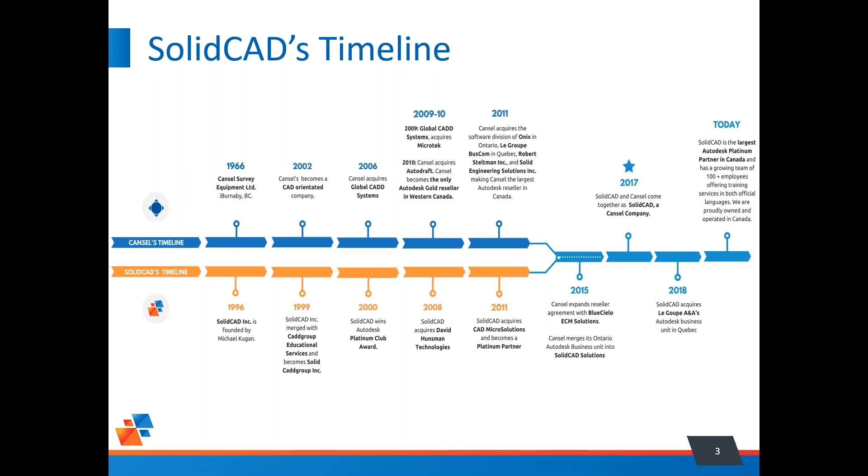So SolidCAD, for those of you who do not know us, is a Canadian company, currently the largest platinum partner of Autodesk and a member of the Cansel group of companies, established in 1996 with a long history in the Autodesk channel. The largest technical team in Canada, specialized in a number of industries: plant and process, manufacturing, AEC, civil infrastructure, media and entertainment.

We support and help our customers become more proficient using Autodesk and other tools through training, consulting, technical support, scan to BIM services, software development, product lifecycle management, and simulation and analysis. Offices across Canada, 15 at this moment, and 12 training facilities coast to coast.

And as a part of Cansel Group, we have access to end-to-end solutions from hardware to surveying equipment, laser scanning, GIS software, and CAD software. Some other tools that we are deeply involved with: FluidFlow, which is really the topic of today's first webinar, and other tools covering different industries.

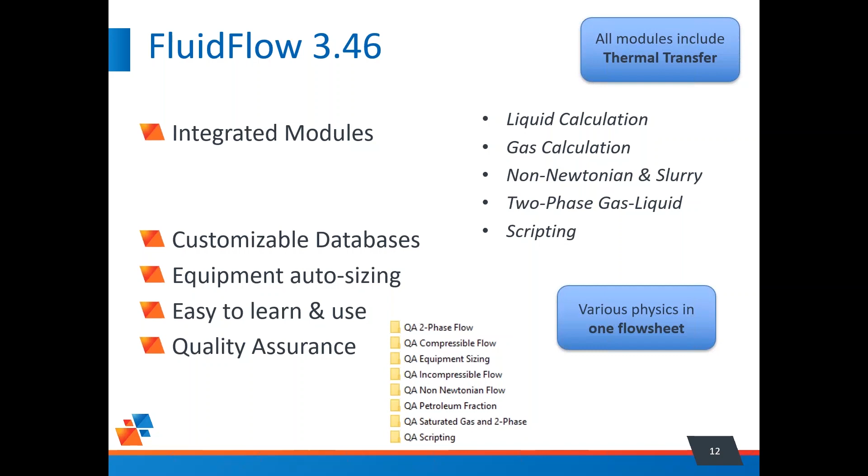So let's look in a little bit more detail here. So incompressible flow, typically for liquids. Some of the important features here are going to be a quick plot of energy and hydraulic grade lines, so you can identify areas of potential problems in your network, especially in liquids flowing downhill, or potential negative static pressure or cavitation problems. The screenshot there, it's a composite pump curve when pumps are used in series or in parallel.

I mentioned auto sizing of components as an important feature. So for piping, it's using the economic pipe sizing model or Genereaux equation. For pumps, the size for flow or size for pressure rise. Other components that could be auto-sized: valves, control valves, orifice plates, rupture discs. Viscosity correction based on Hydraulic Institute recommendations, and affinity law correction for impeller trimming also included.

And in terms of applications, pretty much anything that requires liquid transport: cooling water systems, fire protection systems, mine dewatering, fuel, crude oil, lubricant systems, water transportation systems, desalination plants. So these are just a few applications. I'm sure you can think of some of your own where you could use this.

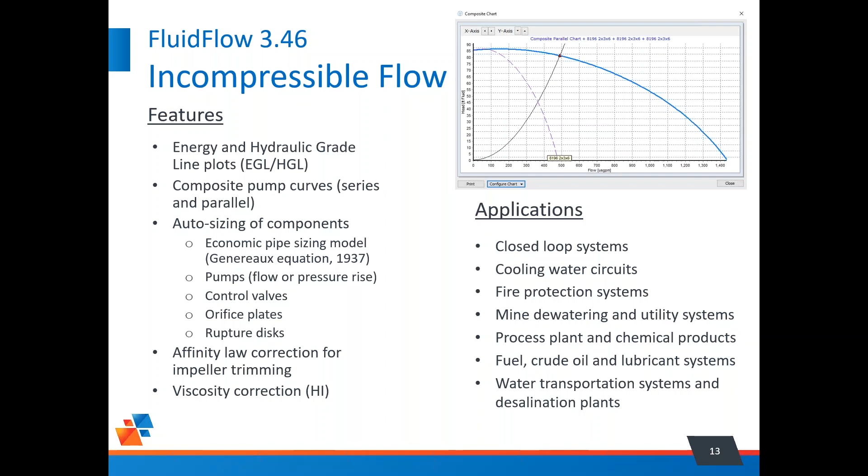The compressible flow module. The important part here is to recognize that FluidFlow does not use an ideal gas approximation, but uses real gas conditions. So there are currently three equations of state built in: Benedict Webb-Rubin with Hans Starling modifications, Lee-Kesler, and Peng Robinson. And this contributes to higher accuracy of results in a gas network.

Some other options here that are going to be important: easily building gas mixtures by mole or mass percentage, detecting sonic choking in components, again, auto-sizing of components, ducts, fans, and compressors, safety relief devices. Addition of heat transfer module allows us to look at the Joule-Thomson effect as well, and the plotting of composite fan curves for series and parallel fans is also important.

And some applications as an example, application examples that our customers use FluidFlow for: dust extraction systems, gas collections, natural gas supply feeds, and then transmission pipelines.

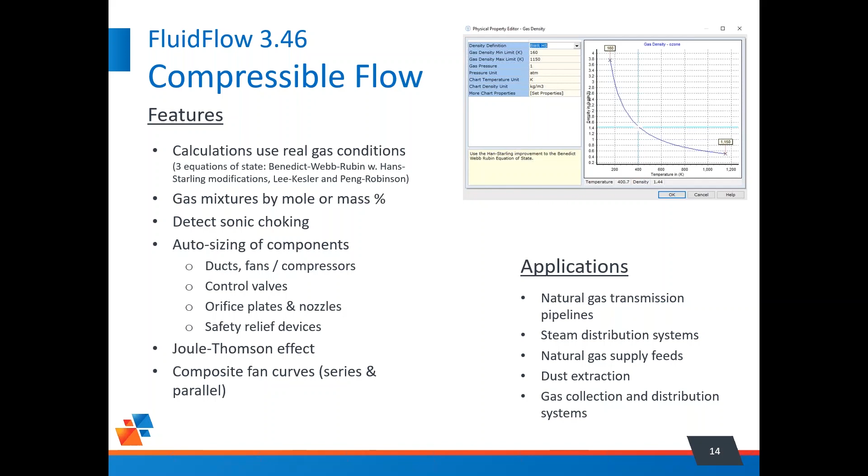Two-phase flow. Currently 8 available two-phase correlations. A highly accurate marching along the pipe solution algorithm for improved accuracy. Automatic flow pattern maps generated, one of which you are looking at right now. You can see the current flow regime on that selected component, stratified wavy. So all this is generated very fast.

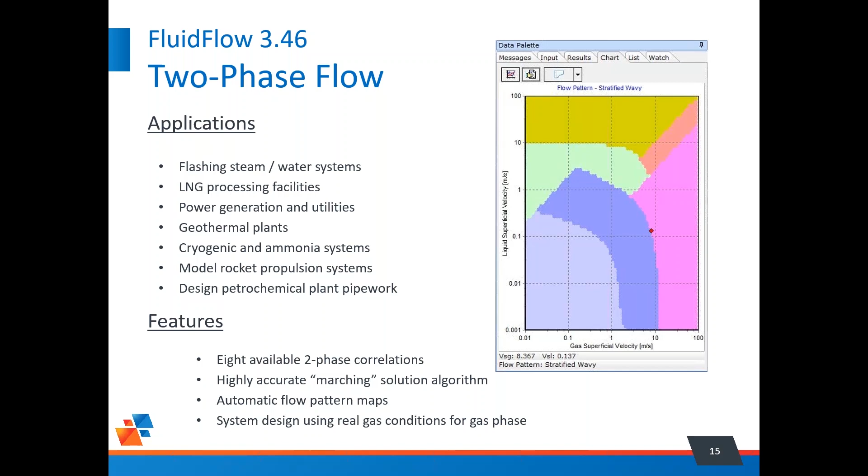The next module, non-Newtonian and slurry flow. Some important tools here that are going to help you in your design process. The ability to include pump derating due to solids. The ability to look at calculated solids delivered per unit time. The ability to find deposition velocities and consequently if blockage may occur in pipes. In general, operational issues and energy saving opportunities.

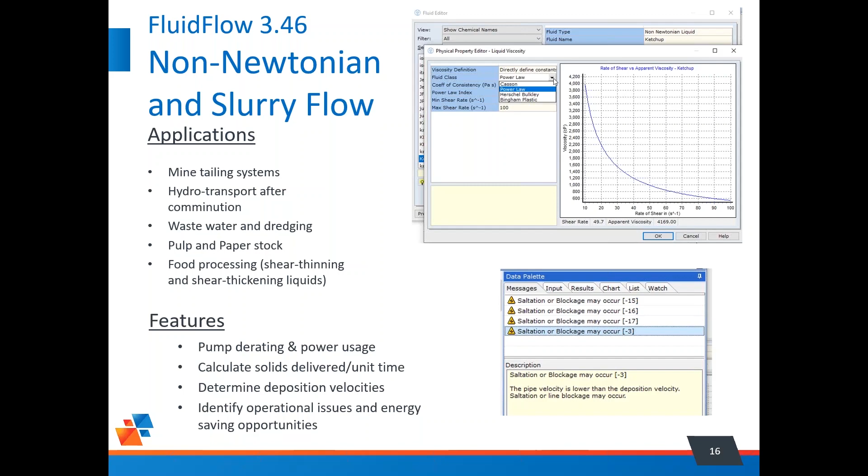Typical applications: mine tailing systems, hydro transport after comminution processes of ore, wastewater and dredging, pulp and paper stock calculations also included. And we have quite a few customers in food processing industries that require shear thinning and shear thickening liquids, molasses, ketchup, you name it. So mayonnaise, yeah. So those are typical fluids in this industry that FluidFlow is being used successfully.

And lastly, scripting or dynamic analysis. So this is a module that requires some programming skills. We're using Pascal and Basic syntax here, languages to create macros that will allow us to tackle all sorts of problems. Basically anything that typically would be manual input or a manual change of boundary conditions, you could think of including in a macro. This way you can look at time dependencies in a system, when boundary conditions vary,

tank fill and drain times, optimization of, let's say, a pumping station where you might want to find an optimum impeller or pump speed based on different pump properties and pump types. So in terms of outputs, you could get results in the graphical window inside FluidFlow, or export those results into Excel, create graphs in Excel. So quite flexible this way.

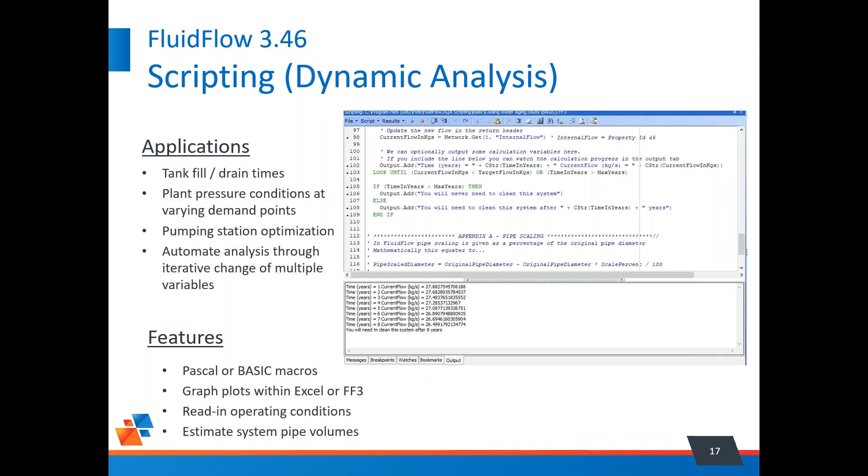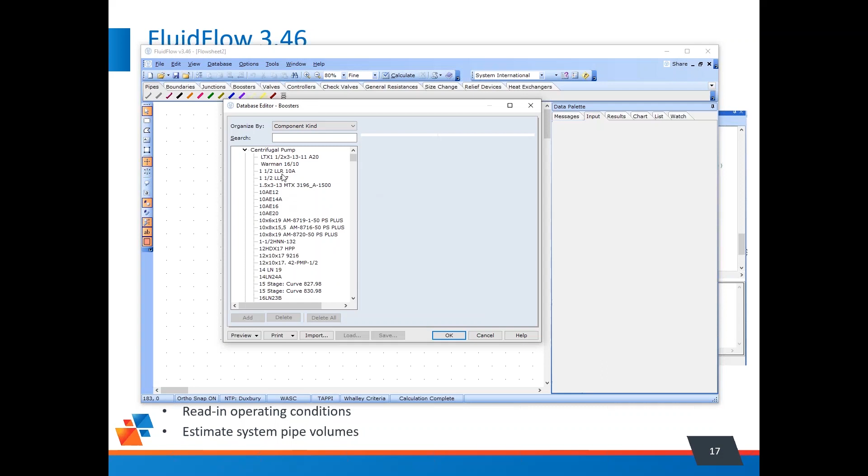Different, let's say, pumps, right? Boosters and fans, pump curves defined here. Everything that entails data entry here has different ways to fit the curve. Again, depends on the type of data, and these databases are definitely important in terms of proper functioning of the software.

About 1,300 fluids currently defined, so out of the box, and as I said, fully customizable. You can create your own fluid and your own mixture. If I'm to, let's say, filter through a simple Newtonian liquid, based on the definition, you'll see in what kind of modules that fluid has enough information to be used in.

So in this case, this kerosene, it's going to be used in a liquid-only application, while a pure Newtonian fluid like ethanol, for example, has enough data that could be used in liquid, gas, and two-phase modules.

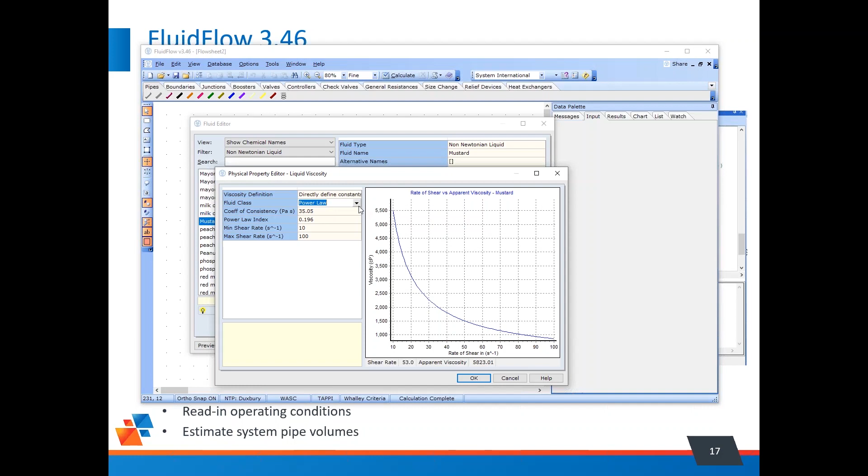Right. Here are some non-Newtonian liquids. I mentioned the food processing industry. Here's a mustard example, and viscosity law defined in this case as a power law. So you can see the viscosity dependency with shear rate. Okay.

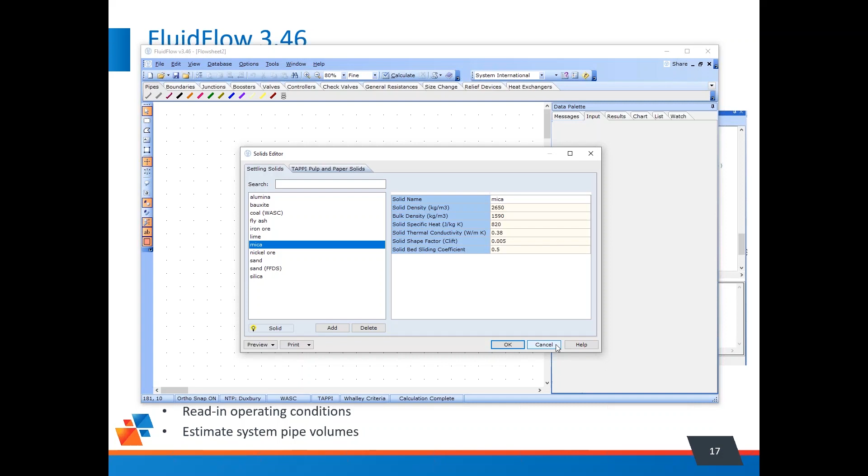Solids database, that's going to be important in settling slurry definition. For example, here's a mica, a solid with the bulk density and solid shape factor value, so the deviation from a perfectly spherical particle. All these properties important for an accurate calculation.

Okay, so again, from an interface standpoint, different tabs that will store different components here. So in terms of pipes, boundaries, so assigned pressure, assigned flows, reservoir, junctions, T, bends, Y, cross, or a generic connector. No resistance through this, but multiple pipes that could come in and out. Boosters, centrifugal pumps, PD pumps, fans and compressors, positive displacement pumps and compressors again.

And valves, typical standard valve types, control valves, flow and pressure control, check valves, general resistances, so CV, CF, and so-called user-defined generic. So this is quite useful when you have a piece of equipment that's not present in the database, but you have actually catalog information about it, and you can define flow properties this way through relationship functions.

Size changes, reducer expanders, venturi tubes, orifices, relief devices, heat exchangers, shell and tube heat exchangers. So different component types, all available out of the box. No need to purchase extra databases of components. They're all included with the software.

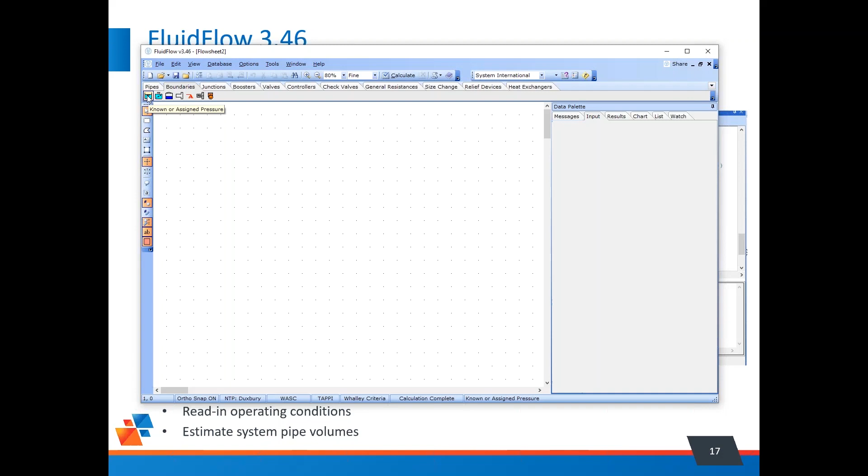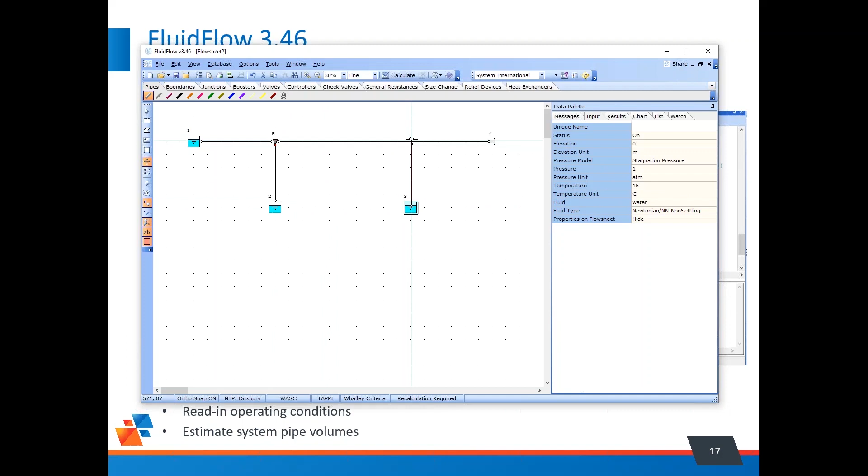So how do you typically operate? It's pretty straightforward. Start with a boundary condition here, and let's say start with a set of, for example, known pressures. I'm just going to throw maybe a couple of known pressure options here. Go back to pipes, and let's say I'm connecting these pressure nodes to pipes and end that with an open pipe. Connect this one with an existing pipe that adds a T junction right away. Very straightforward, easy to work with. Right?

So in terms of units, I could easily change from US Basic to SI. Properties, well, you've got length, you've got elevation on nodes, and the actual fluid. So let's, for example, quickly create a mixing network here.

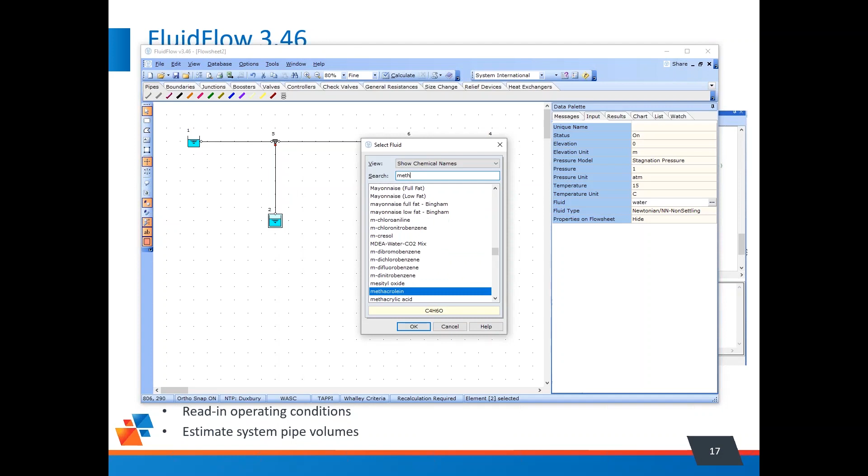So let's say ethanol at 1.7 atmosphere coming in here, maybe methanol. So right now I'm poking into the fluids database, right? Newtonian and non-Newtonian non-settling type, so not a slurry. Say maybe 1.5 atmosphere, and then let's say octanol, for example, at 1.5 as well. Now let's do something else.

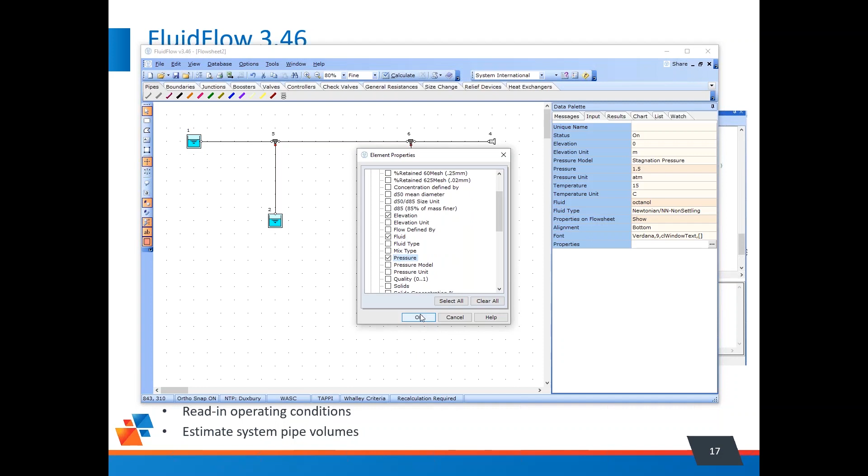Maybe I'd like to see some information on screen, which I could also look at using the flyby like that. But I'm going to select these pressure nodes and show some properties on flow sheet, like maybe elevation, maybe fluid, maybe pressure. There you go. And let's do a calculate, right? So we can see the flow direction easily, and also some messages here, high pipe velocity.

So as I mentioned earlier, we're using an economic pipe sizing model by default using the Genereaux equation. So this is flagged as a warning because of the calculated velocity on that pipe segment, which, by the way, its number is here, -1, right? Calculated velocity is 14 feet per second. Suggested economic velocity and an economic size about, let's say, 4 inches.

Economic velocity at 4.2 feet per second. Okay? So too narrow pipe, too high velocity. By the way, these warnings, you actually can configure the limits on them. If I'm looking at liquid limits here, there you go. So what's considered too high pipe velocity, it's about 14 feet per second, right?

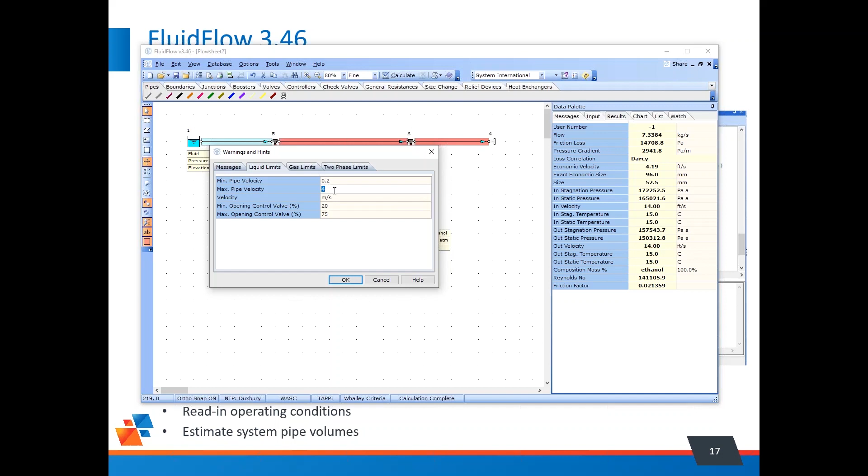So the calculated one is, sorry, let's say 12 feet per second. The calculated one is 14, out of range, hence the warning. So very straightforward to work with. Let's maybe jump into a couple of other examples here before we run out of time.

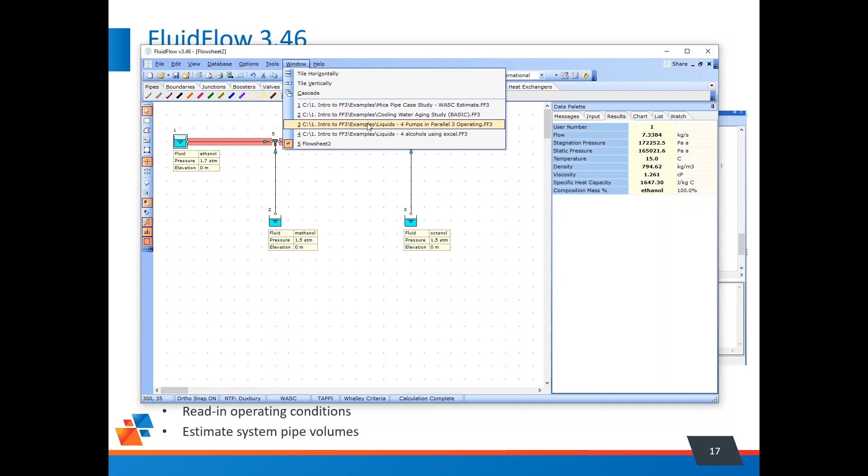So let's say, for example, here's a slurry network that goes at different elevations. All these nodes have a different elevation listed here. So if I'm going to hit calculate on that, so what do I have here?

I have an input into the network of 45 cubic meters per hour as a total slurry flow of water as carrier and mica as a solid defined by a weight percentage. I'm not using size distribution data. I'm simply using D50 and D85 at these values.

So what can I get from this? Well, on the outlet here, I can get solids delivered. So I'm looking at just under 3 kilograms per second of solids delivered, a total flow. On a pipe, I'm looking at deposition velocity here, right? So all important information to see if I'm running the risk of a blockage or not.

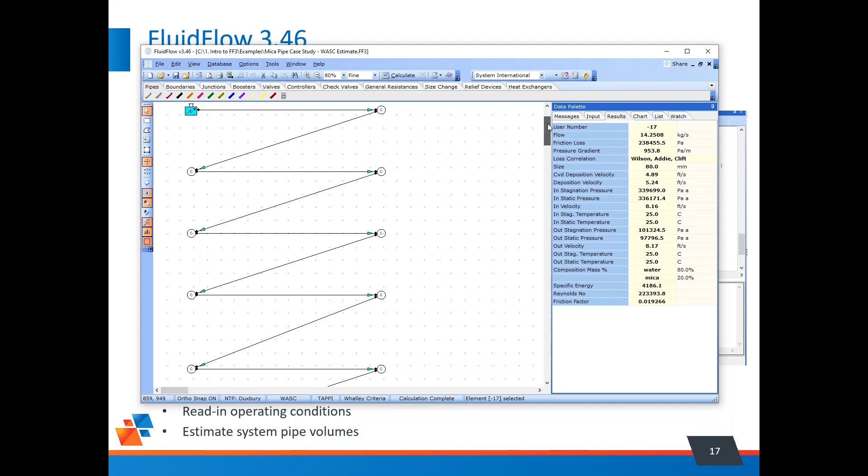So out velocity calculated is 8 feet per second, deposition velocity of 5. So no risk of blockage. Or if we decrease the flow, let's say 25 cubic meters per hour. Okay, and in this case here, what the message is saying to us is saltation or blockage may occur.

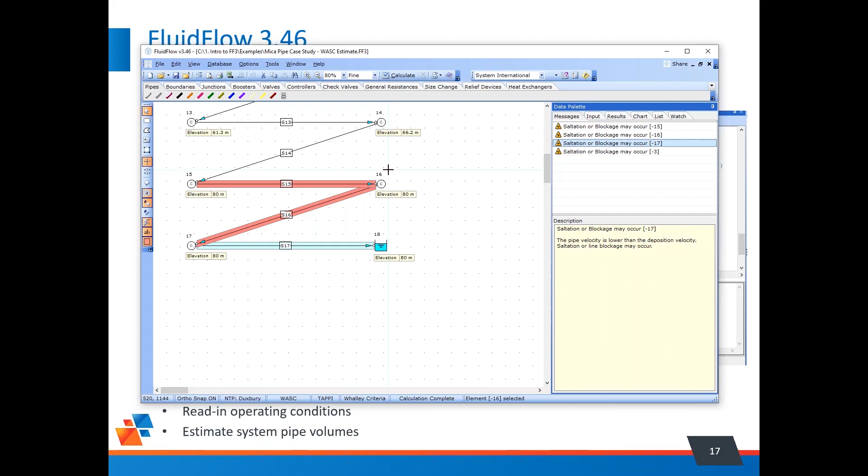Right? So now my out velocity, calculated 4.5 feet per second, is very close here to the CVD deposition velocity. Right? It's just under it. So a warning that I may run the risk of blockage in the pipe, and a few more pipes with the same warning. So a quick example of slurry transport.

Let's look at this one here, 4 pumps in parallel. So we have these pumps right here, right, and the reservoir containing water, and we're transporting that farther out and higher up.

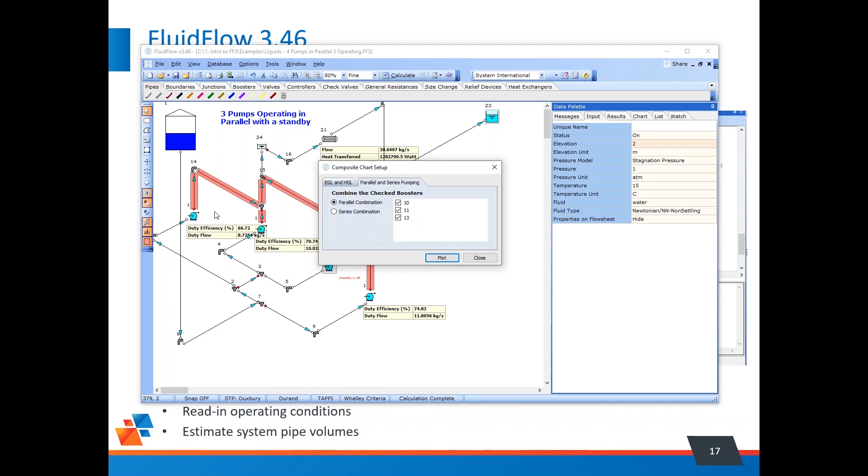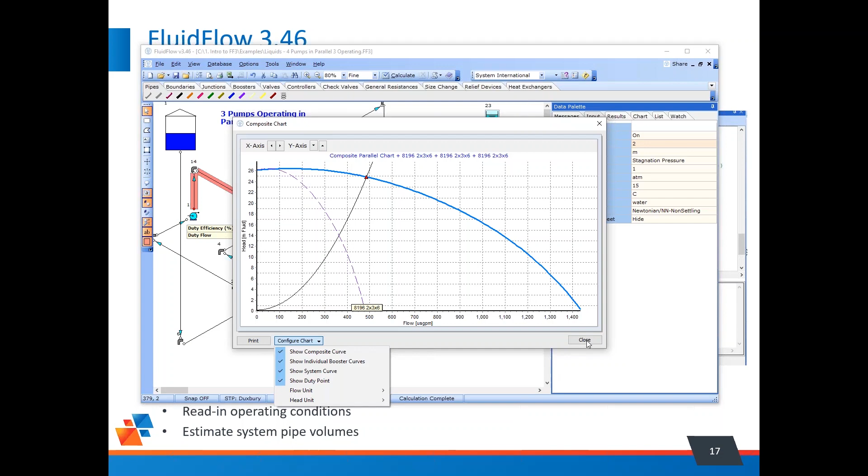And if I am to show the composite chart setup, let's say between these 3 boosters, 10, 11, and 13, these are the node numbers of the pumps. The composite chart looks like that. Okay, so you can see the duty point there. You can see the system curve and the individual booster curves. These are all identical pumps, so one single curve for that. Okay. Again, very useful information.

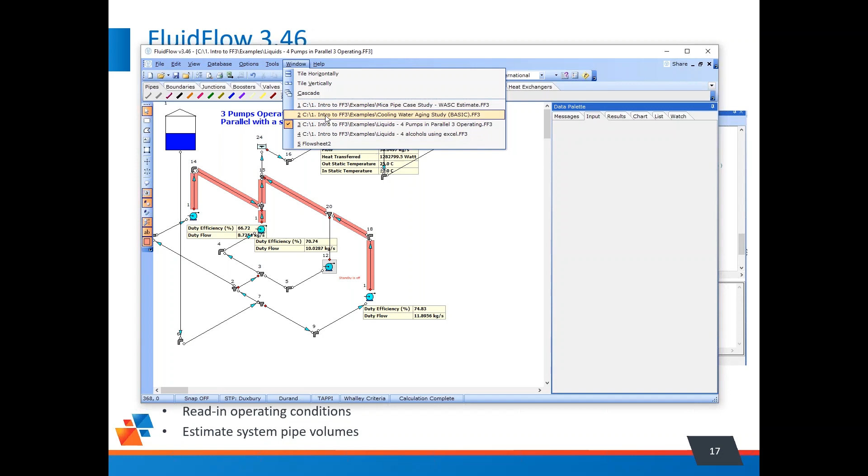And lastly, gonna jump into this as a scripting example. Okay, so let's say over a period of time we have some scaling happening in the pipe, so some deposition of material there that reduces the diameter, and we would like to get an estimate on after how long we should schedule some maintenance, some cleanup, or maybe some replacement on some of these pipes.

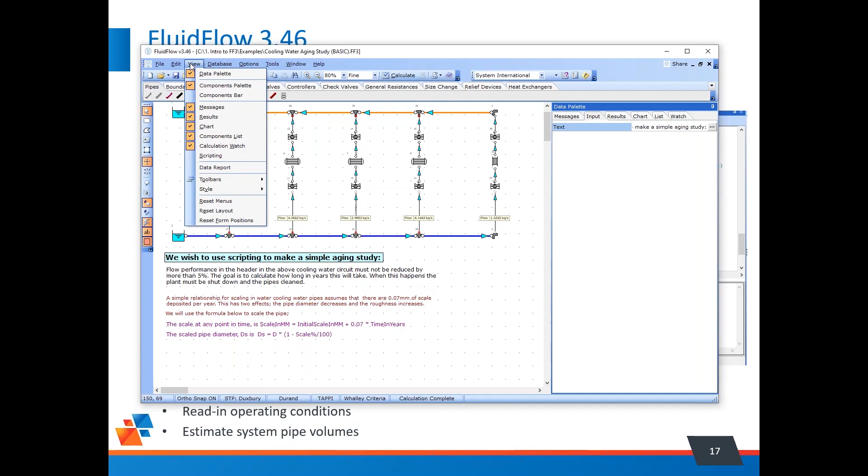So let's look at the view scripting module right here. So this is script in Basic language. You could also use Pascal, as I mentioned. Let's do a quick calculate, update the network, and then run the script here.

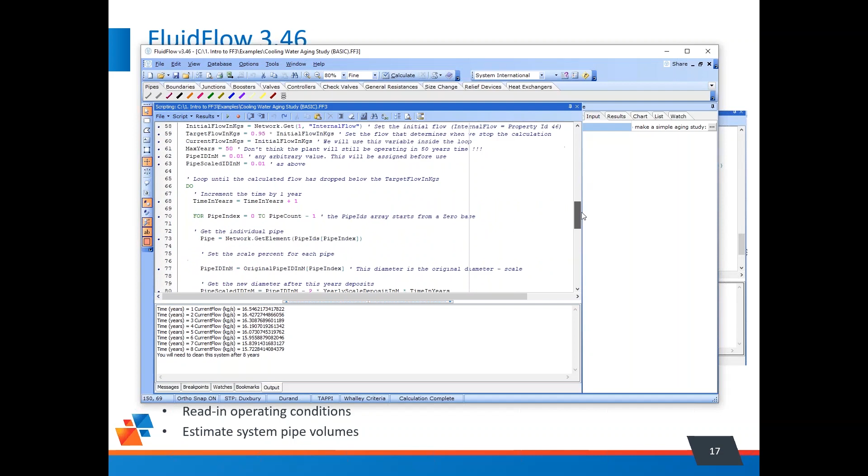So this will consider the variation in the pressure drop due to scaling over an amount of time, and it will keep on updating that and give us information on how the flow will be reduced over that amount of time, and when we should consider this as not suitable for service anymore. Too much scaling there. So I hope this has been interesting and useful as an introduction to the tool.